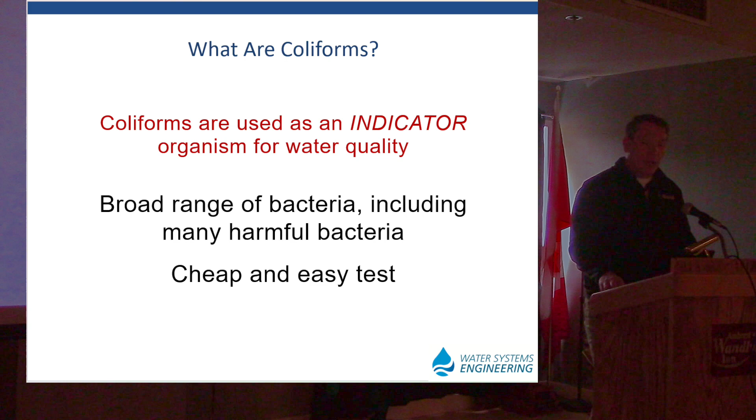In Canada, the MAC is non-detectable per 100 milliliters. Stateside, it's per 10 milliliters. So there's a good differentiation there when you're working with a lab. Different levels will trigger different responses. So stateside, you get a coliform hit, you need to retest. If it becomes kind of a periodic issue in the well system, you're going to explore the system and look at vulnerabilities.

And one of the big changes I've seen on both sides of the border is separating the E. coli test out. Very good, those are specific to enteric contamination. But then also coming up with treatment plans for the well system. Even if you don't need them at that time, have a plan in place for the next time that the coliforms present themselves.

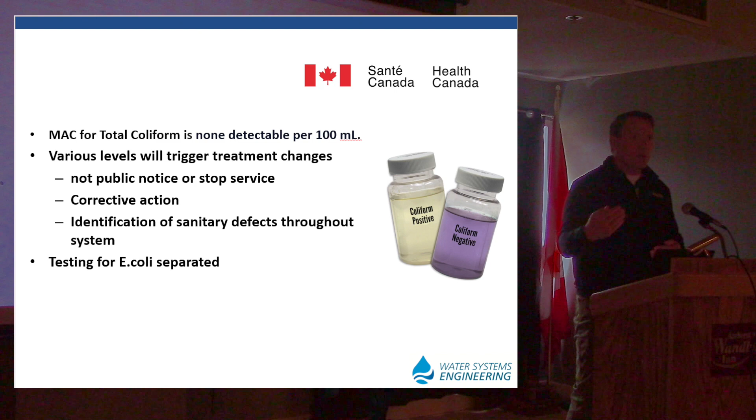So some general information about coliforms. They typically are anaerobic or facultative anaerobic bacteria. So while we catch them in the grab sample from around the pump, more often they're in the lower extension of the well system, where flow has been impacted because of fouling or is reduced.

It's not uncommon, especially in deeper well systems, to dig the well and try and maximize production. And maybe that lower extension is hydrologically isolated and might contribute 3 to 5%. And that's a perfect place for these anaerobic bacteria, including coliforms, to reside. What we have found, both in research in our lab and across the water industry, is as a bacterial population matures and the biofilm grows, it's more likely to harbor coliform bacteria.

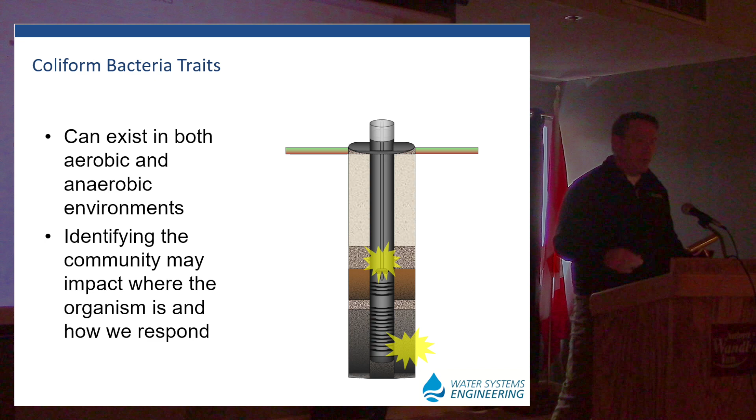So when I have a customer come to me, they had a coliform hit, and unfortunately, usually they've had multiple by the time they come to me. So they'll ask me, what do I do? The first I'm going to ask them is to classify the organism, and that gives me a better idea of where it is and where it's from.

Did it naturally develop within that environment downhole, or do we have an indicator of, let's say, root traces, or active soil bacteria, or vegetative matter that's going to give me some insight there. Also, I can rule out fecal coliforms at that point. Also, enumerate, so get a population count of the coliform.

As an example, if we get environmental coliforms developing naturally downhole, they could be 2 to 20 per 100 milliliters. And that's not big. It's still going to trip your test. But a true septic system influencing the well system is going to be 2,000 colonies per 100 mils. It's going to be several orders of magnitude more.

Flooding, when you get a little bit of everything from a river system introduced, that could be around 200. So that still is a problem we've got to address, but it's not the level of direct contamination. It's something we can actually deal with. After we enumerate the coliform issue, let's get an idea of the bacterial community in general. How large is it? Is there more biofouling going on downhole? And then, as always, let's investigate the well and the well site.

So for testing, identifying the community. One of the easiest methods to do, one of the most common, and it dates back to the late 1800s, is the heterotrophic plate count. Depending on the test and the methodology, it's going to give you a range of 0 to 500, 0 to 1,500, or 0 to 5,000 colony forming units. And your heterotrophs are predominantly aerobic bacteria.

While this has been a really good method and it is an industry standard, it's very dated. What we have learned now in the microbiology world is that roughly less than 10% of the known groundwater bacteria grow on heterotrophic plate. But if nothing else, it will give you an assessment of the reactivity of the bacteria. So if that's the best you can do with your local lab, some information is better than none.

ATP, the adenosine triphosphate, is a relatively new method. It came from the food industry as well as the dentistry side of things. And it gives us a flash count of total bacterial population, aerobic and anaerobic, all living bacteria. Small, large, regardless of if they would respond to a blood agar or not.

So some of the ranges: on a standard 0 to 1,500 HPC, once we get above 300 colony forming units, we have the potential for dynamic colony growth. Certainly the higher we get in that level, the greater potential. On ATP, which is cells per milliliter, a typical well system will have between 1,000 and 30,000 cells per milliliter normal. That's your background resident population within the aquifer.

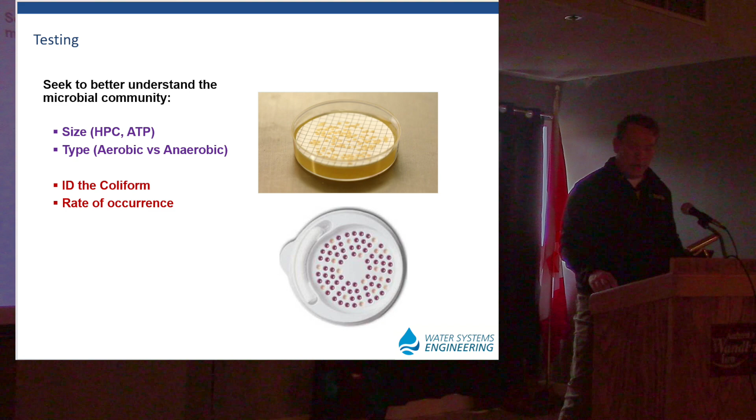Understand the maturity of the population in general. Look at our anaerobic levels. And this might be, if you only have one test, to go to this. Because the more anaerobic growth we have downhole, the more impeded flow we have, and the more likely we're going to be able to isolate where our problem is, the lower portion.

The results are given in percentage of the total bacteria, and so it would be the total that are anoxic, or like the lower extension, more dynamic biomass to get the oxygen out. More of your opportunistic pathogens, your sulfate reducers, and other nuisance bacteria fall under this category.

So what I would look at is, if you've got a coliform issue and you can only run one test, run the anaerobic growth level. If you've got greater than 20%, we typically have a cleaning problem as opposed to a disinfection issue. That well just needs some TLC. And that's not uncommon, especially in residential wells where preventative and regular maintenance is more of an afterthought.

Look at how the well has been utilized. One of the big challenges we get is from real estate agents that will call and they're dealing with a property and it keeps hitting coliforms. And so I'll ask them, well, how long has this house sat vacant? Has it been off the market? Did someone in the family die and it's got to go through probate? And they always wonder, how did I know that? Who have I been talking to?

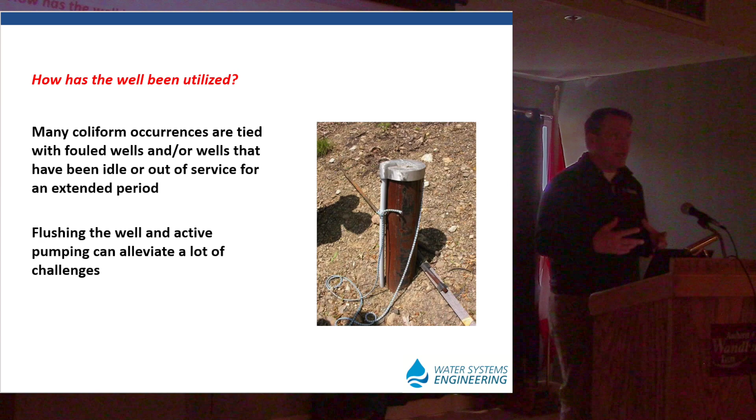And then move back from the wellhead. What's happened in the area around the well? And with residential wells, you're talking about a 100-foot radius. In larger well systems, you want to look a little bit further there. Areas of recharge, of runoff, changes to the use. Has industry moved on? What was once pasture is now acres and acres of homes. So look at the changes there that could have influenced the recharge and the water or the products going into that well system.

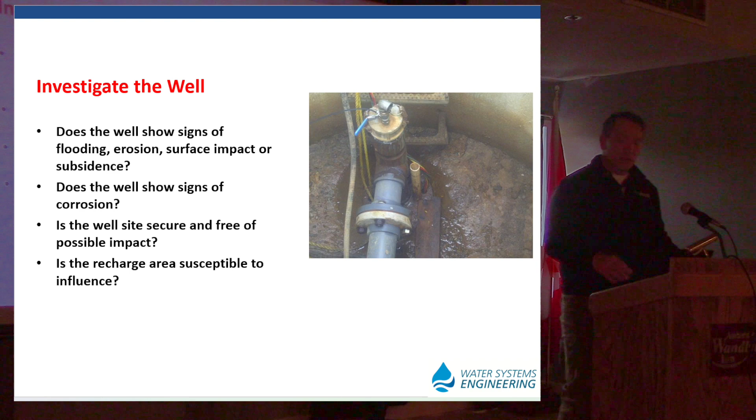This is one where they had routine failures, and it might be a little washed out, but what we have here is you can see they've got what they call a crow's nest and an elevated ladder because this area does get flooded. Now, it had received some pretty substantial flood waters in the last 8 months ahead of this, to the point that the pad for the ladder there is completely gone, and the animal that had taken up residence around the well seal there had been drowned.

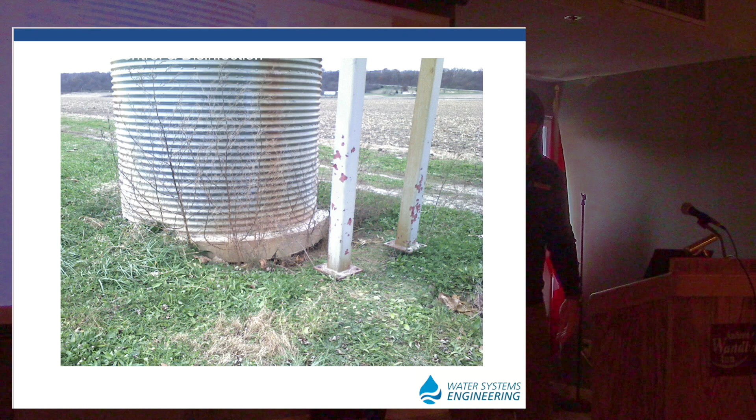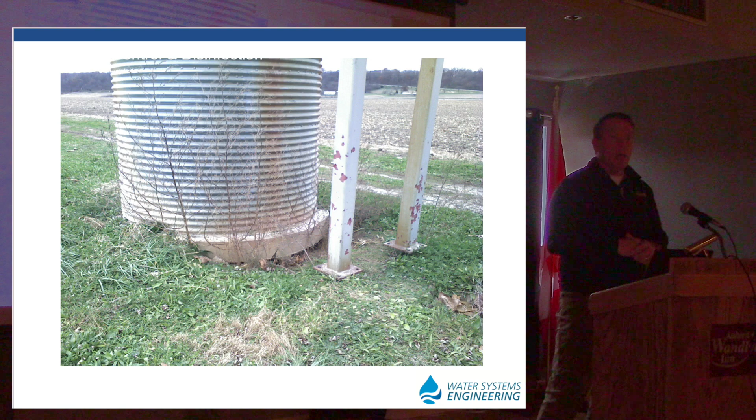So you've got vulnerabilities here, you've got vulnerabilities of the whole structure. There's corrosion occurring on the crow's nest, the anchor point here, so we know that the area was destabilized. A simple dye test let us know that there were direct conduits from the surface into this well system. When we investigated further, and up in here is an active farm field, we found a lot of nutrients. Nitrates were very high, a lot of beautiful topsoil in the bottom of that well system.

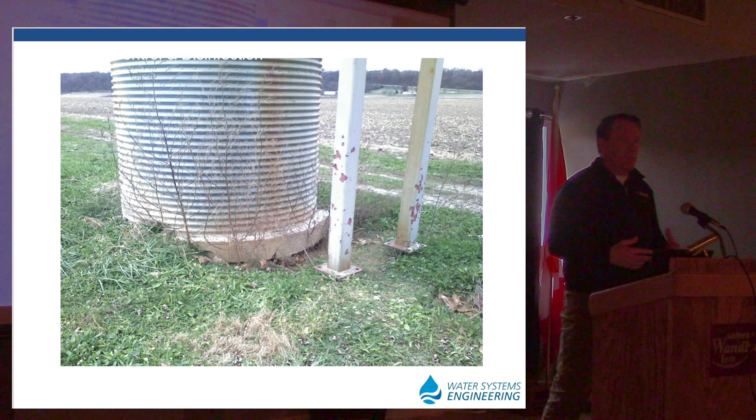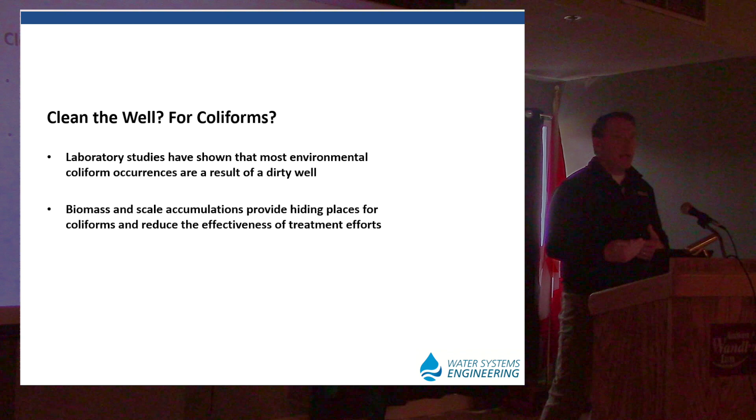As I mentioned, more often than not, the coliform occurrence is just the final symptom of a problem, poor maintenance. And this is true for wells of all sizes. You know, as much as we advocate not doing it, we're an industry where our customers run to failure. And so we'll get away with a number of years just doing simple disinfection, and then disinfection no longer works. And we look a little closer and we have problems like this.

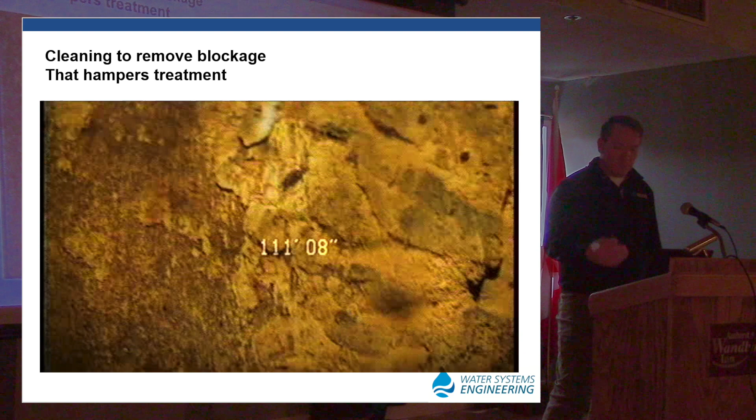If we've got to clean the well, let's use multiple methods. Let's go in first mechanical, flush out the lower extension of that well, knock all the debris off, whether it's mineral or biological or a combination, get that material out. Even if we just go back in with simple disinfection, it's going to have a greater potential to getting into the nooks and crannies where our problem bacteria are hiding.

Depending on the system, if we can pull the pump, let's pull the pump, power wash the column pipe, disassemble the pump if it's a larger system. If not, look at the need for replacement. Try and clean and disinfect that equipment as best as possible.

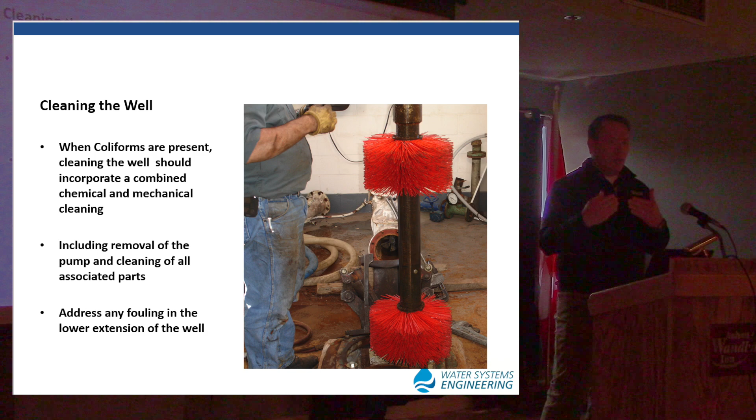I also strongly advocate when you pull this material out of the well, regardless of the well size, keep it elevated. If you've got to put it on the ground, put it on plastic. And it's just CYA. Let's give the best potential to remove these problems and not reintroduce anything there.

Age old, what we have is state extension offices, and they handle a lot of the rural, a lot of the ag well systems. And they will still, in many states, advocate shock chlorination. Shock chlorination is using a high concentration of chlorine, typically around 1,000 parts per million, to alleviate the problem.

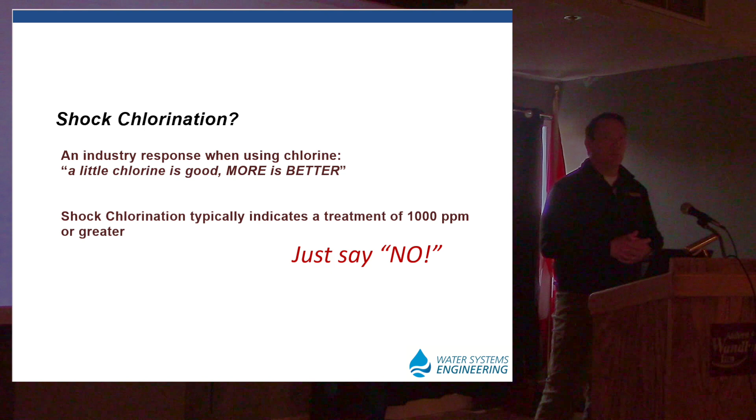It's a nuclear option. And how we got to it was chlorine is cheap, a little is good, a lot's got to be better. And I was victim to this myself. You know, I don't want to use the rest of the jug. It says I only need a cap full. I don't need this at home. Let's just empty it all in there. You know, we're pushing 3,000 to 4,000 parts per million.

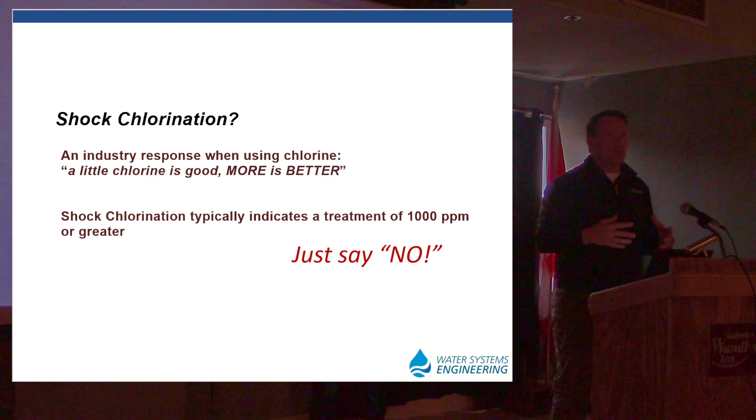What will happen in short term is that biomass will recoil like a snake. And it'll pull back. You'll get some improved flow. And you can get some kill with the free-swimming coliforms, but anything that's hiding under there, it's now got a food source. It doesn't have to send out for groceries. And so you will see in very short order an explosion of population. And so you do get some temporary relief from the problem, but in long term, it's been very detrimental. And we've got a much more dynamic bacterial community to target.

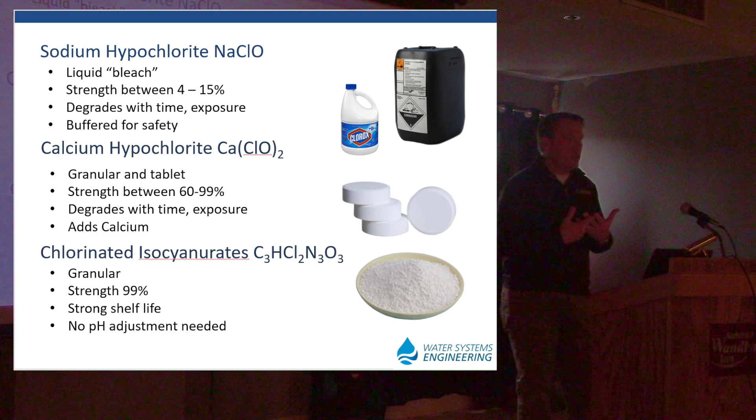The chlorinated isocyanurates, if you're familiar with Steriline or NW-420, this goes right into solution. It doesn't contribute calcium. It's very shelf stable. Very effective means of chlorination. We don't have to adjust the pH, so we're generating hypochlorous acid as soon as we put that into solution.

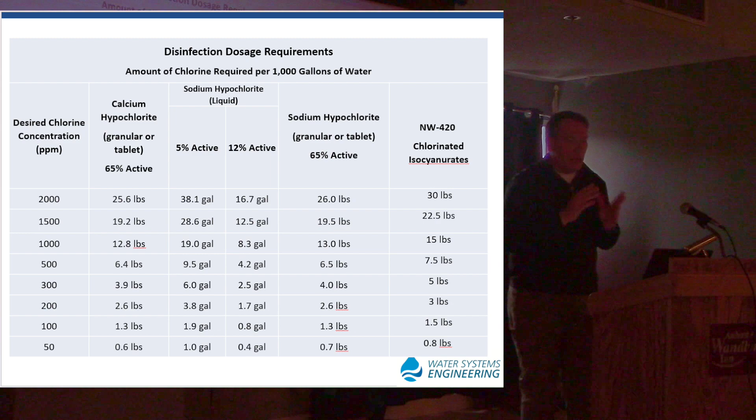So to improve disinfection, we want to control the pH, we want to flood the well with a larger volume, we want to give it sufficient contact time, I'll talk about that in a minute, and then we want to monitor the reactions. And I apologize, I got my slides mixed around here. So this is the pH chart that we talked about.

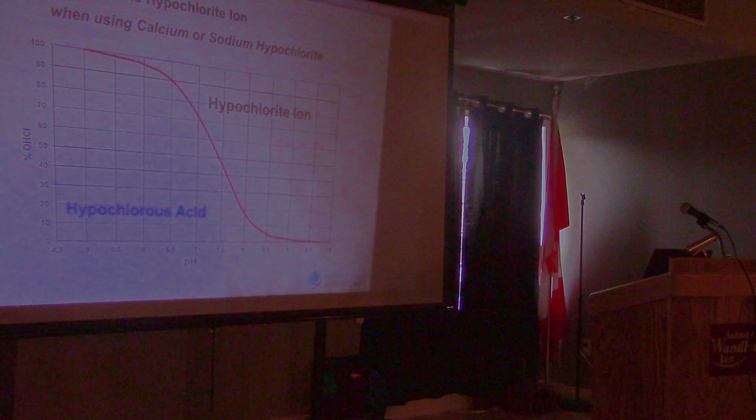And the hypochlorite ion is our safe, transportable, stable ion that our sodium and our calcium hypochlorite come into. Hypochlorous acid is the disinfectant agent. That's where we get our biocide. And when it's in acid form, we're in that 4.5 and lower, it's at 100%. It's a very, very effective biocidal agent. As I mentioned, can cause fatalities.

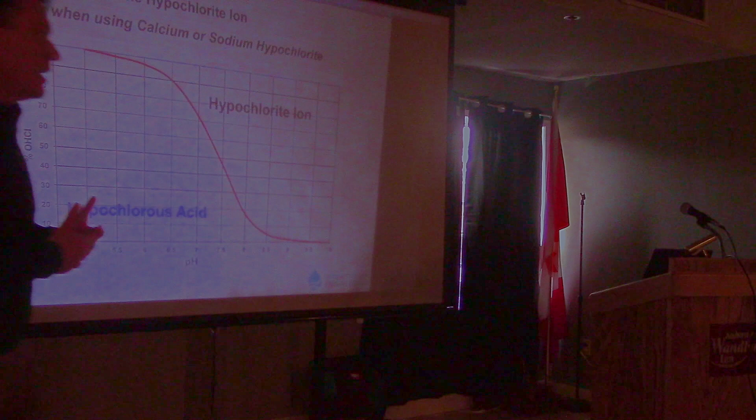And that 6.5 to 7.25, we're in that 80 to 90% range there of hypochlorous acid production. Much more effective. Doesn't take a lot, depending on your alkalinity. If you're less than 200 parts per million, maybe a gallon per 1,000 gallons of a weak acid. So a little goes a long way there.

Chlorine enhancers we talked about earlier, designed to adjust the pH for you. Some of them are surfactant based, so it increases the penetration of a filter pack. Some of them also have secondary cleaning, so you don't have to go through the full cleaning process unless the well is really heavily befouled.

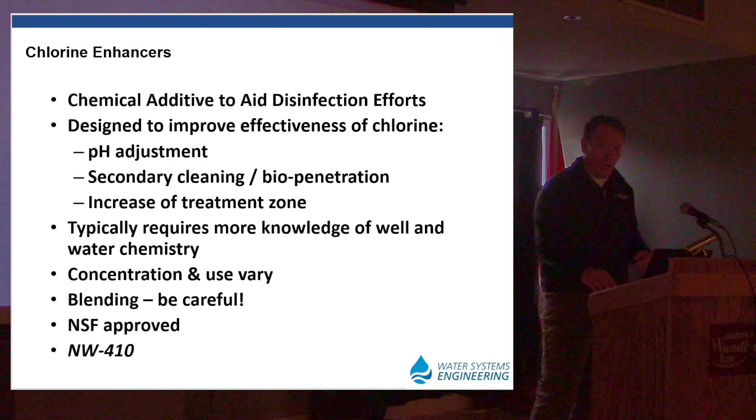With the total coliform failures that we had in the early 2000s, the Michigan DEQ, and they sit with the Upper Peninsula and the Lower Peninsula right on the Great Lakes. And there's a ton of shallow alluvial wells, drive point wells. I heard something like 8 million wells within that state. A lot of temporary use, cabins and cottages on the lake or in the wooded areas of the Upper Peninsula only see 3 or 4 weekends a year use. And so they were having a lot of coliform challenges.

And they did a deep dive and a ton of research on what was the best contact time for chlorine. And so they came with a minimum of 1,000 contact units. And the 1,000 contact units is the end result of the chlorine concentration times the hours of contact. So if you're using 200 parts per million sodium hypochlorite or isocyanurate or calcium, how do you get to 1,000? You take that times 5 hours to get your 1,000 contact units. This would be the minimum.

I'm always a strong advocate, especially if it's been a problematic well system. Push it to 24 hours if possible, as long as that chlorine residual is stable. Now, over 24 hours, I wouldn't advise it. You have the potential for corrosion, and if the problem is that stubborn, you generally have got some cleaning to do. But at least 1,000 contact units or maximum 24 hours.

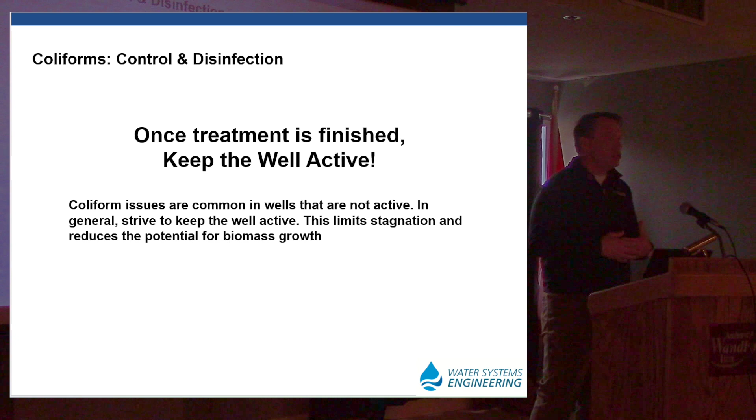On the neutralization side, we talked about this a little earlier there. Depending upon your local regulations, you may need to be below 1 part per million. So products like the NW-500 or Chlor-Out or sodium thiosulfate or sodium bisulfate will rapidly neutralize the chlorine. A little goes a long way. Very difficult to over-treat that and create a secondary problem like we could with the acids and the caustics used. Generally, that goes right in the solution.

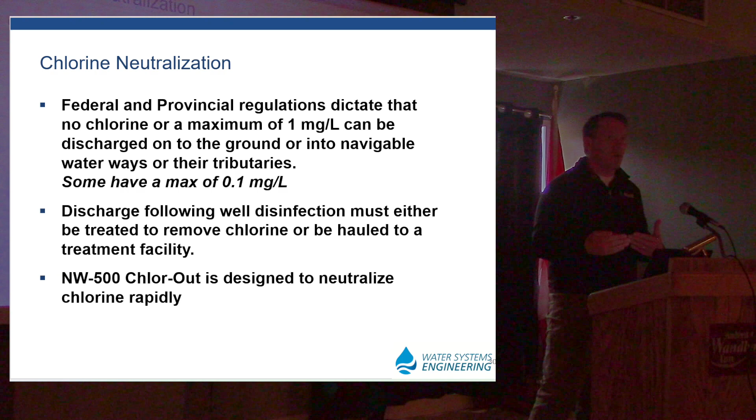So the other thing is if you don't have those chemistries available, open air tank in the sunshine. That may take a day or two to neutralize that chlorine and settle out the solids, but it can occur naturally.

My protocol, and this is typically for screened well systems, just walking through some of the slides that we visited today. We're going to identify the problem, and that would be the nature of it. Is it a fecal coliform? Is it environmental coliform? Is the well fouled and not had any cleaning?

We're going to investigate the well, and if nothing else, we're going to pump the well. Multiple volumes, make sure that we don't have any stagnation going on. If we're going to proceed with cleaning or a more involved disinfection effort, let's pull the pump, brush or clean as a preventative, or a pre-treatment, and then fully evacuate. If it's heavier than that, if it's more advanced fouling that our testing showed, then we'll proceed with the cleaning at that time. Evacuate all debris.

Even if we don't do the pre-treatment of brushing, let's get down to the lower extension of that well and flush out anything that may have built up there that could be harboring the coliform bacteria or is also going to consume the chlorine that we utilize. Prepare our chlorine solution, 3 to 4 volumes. Even on larger wells where this may create 20 to 30,000 gallons of treatment solution, I advocate this flooding to completely disperse that solution throughout the entire column.

Confirm that our chlorine concentration is viable, whether that's checking the pH or checking the mix ratio or both. Confirm that that solution is active and is at our target goal before we add it into the well system. If possible, try to tremie it throughout the perforations or the producing zones. If not, tremie it directly to the bottom of the well and just keep adding until we volumetrically displace. Provide any type of agitation possible. The mechanical energy will help the physical dispersion, and if there is any cleaning that needs to be done, it's going to provide some secondary benefits there.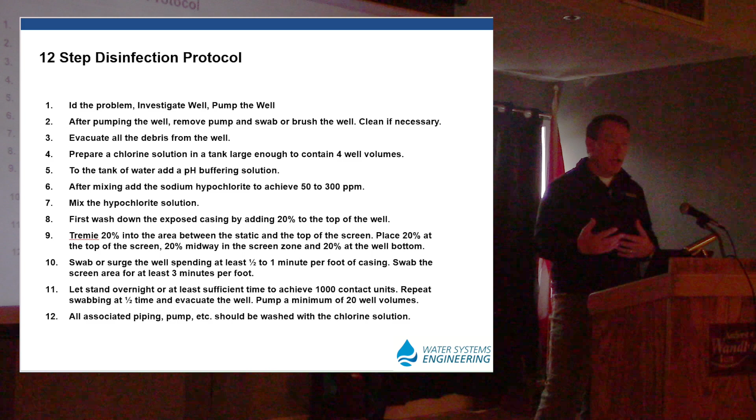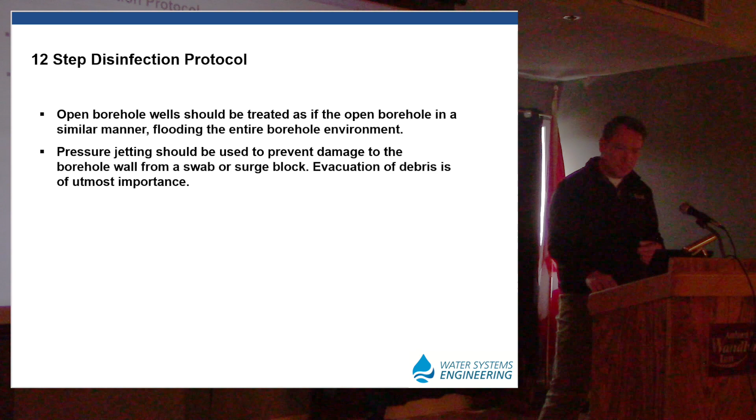With open borehole, very simple methodology. The one challenge is your mechanical is going to be a little different there. In that respect, I don't recommend a surge block or a brush. Low pressure jetting is very useful. Airlift and eductor pipe is also useful. We still want to flood the entire area there, try to account for the fracture system, and you're going to know better than I what that will mean. Maybe we need to look at 5 times the volume, or maybe we're going in at 2 to 3 because it's a slower, smaller, tighter fracture system. And that's our disinfection discussion.

Again, like I said, I rushed through the last one and got us to the break there and missed on questions, but are there any questions on disinfection and chlorination?

This sounds real simple, maybe, with dug wells. When you're treating with the bleach, treating a 21-foot deep well, 3 feet around, gives you roughly 900 to 1,000 gallons in a 21-foot section. How much would you put in? Half a gallon? Would you put a gallon? What would you put to bring it to your optimum disinfection?

Okay, so when you're dealing with right around 1,000 gallons, assuming we've got, let's say 180 parts per million total alkalinity, pH is neutral, I'd be looking at about a half gallon of a weak acid. And I would add in a quarter of that material, check my pH, add in a little bit more, and try and keep it in that 6.5, 6.75 range before I added in the chlorine.

The other thing is as I added in that weak acid, I want to make sure that it's mixing, that I'm not just acidifying one part of the tank. Then I would add in my chlorine, certainly not going to stand over it, but open air, add it in, mix it again, and check both my pH and my chlorine solution. We should be right around a 7 at that range, and then we can proceed with our addition.